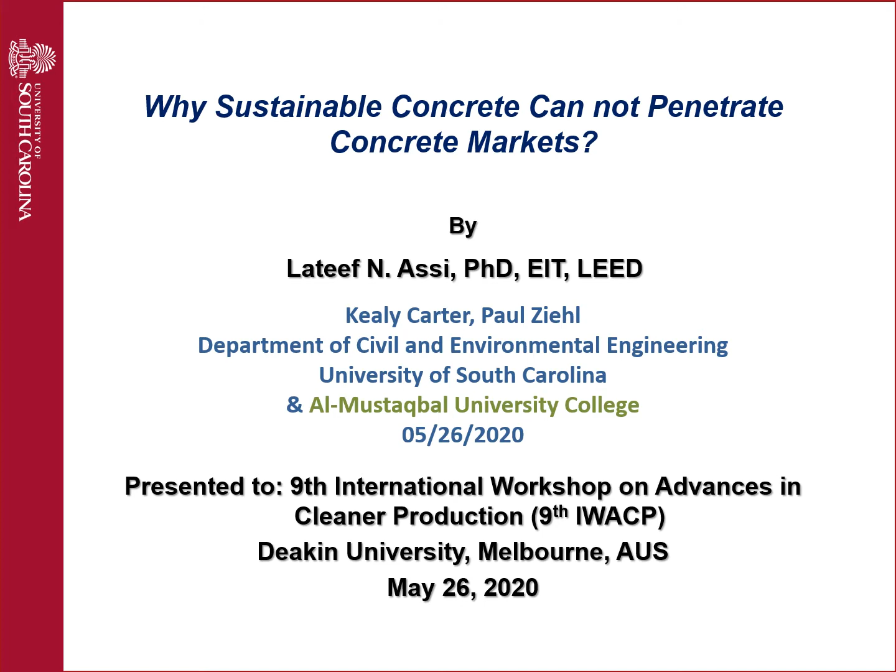So the outline: I'm going to talk about the background, then our previous work and findings, then objectives and survey results, and finally the overall conclusions.

So the background: we know that a lot of attention has been paid to global warming, and the main reason is the CO2 emission. A lot of studies show that Portland cement is responsible for between 7 to 10% of CO2 emissions. Therefore, the need for alternative cement is essential.

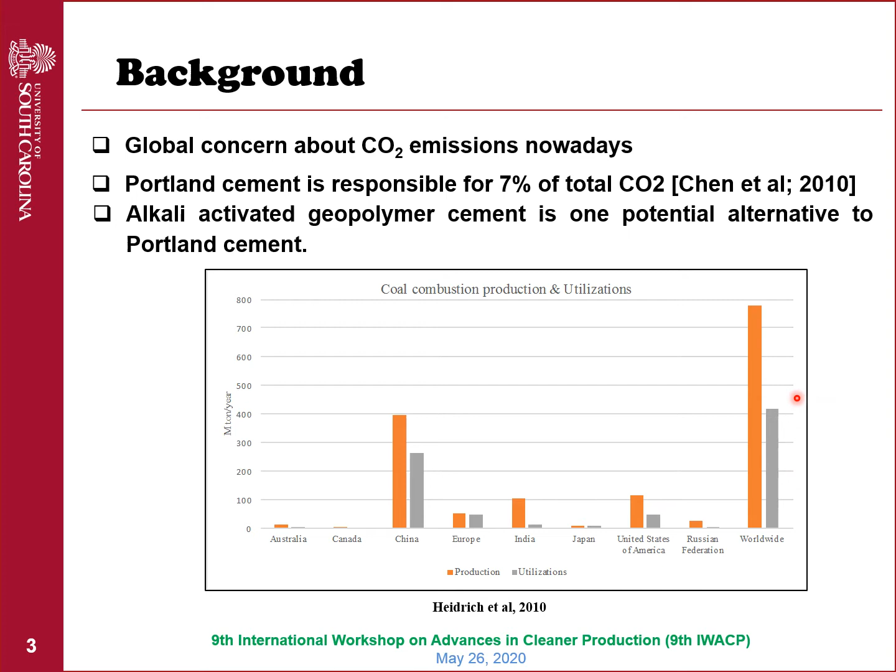So the geopolymer or sustainable concrete that we are using consists of an activating solution such as sodium silicate, sodium hydroxide, or a mixture of silica fume and sodium hydroxide, and a source of aluminum silicate such as fly ash, and fine and coarse aggregate.

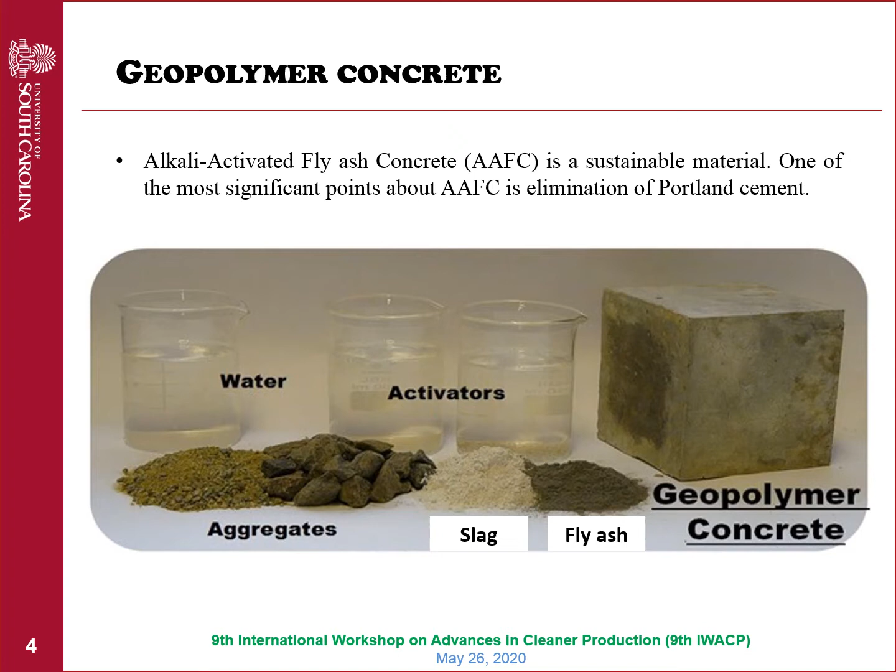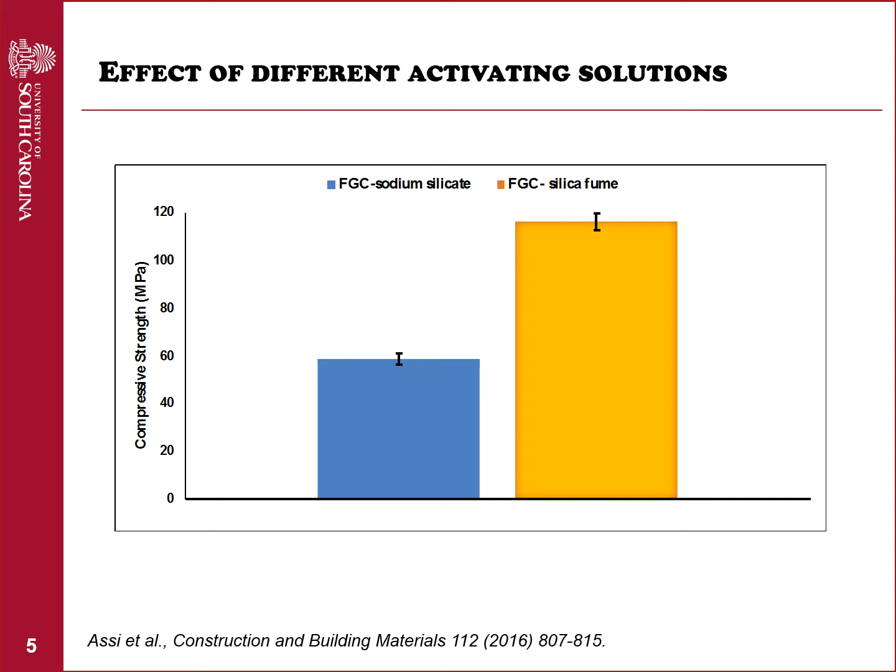However, the only problem with this concrete is the need for external heat. It has to be subjected to 70 Celsius for 24 hours.

So our next step was to eliminate the need for external heat, by introducing 5% up to 15% of Portland cement. So the need for external heat was removed, and the initial and final setting time was also improved. Also, we reached up to 65 megapascal.

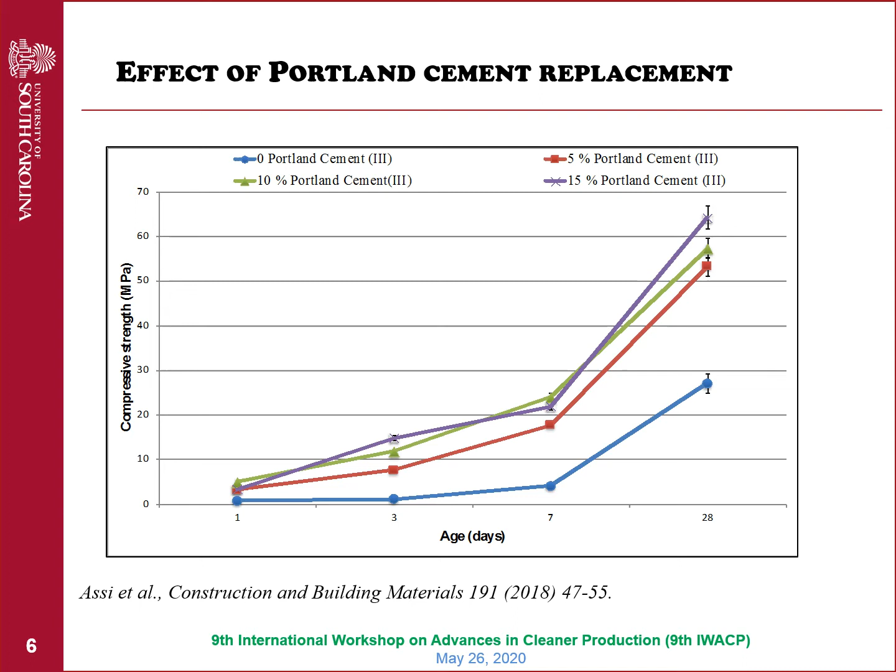Another problem that we fixed is the initial and final setting time. The main problem with our sustainable concrete is that the initial and final setting time is very short, within 7 minutes. So we introduced between 3 to 9% of sugar, and we found that the initial and final setting time was enhanced by more than 60 minutes.

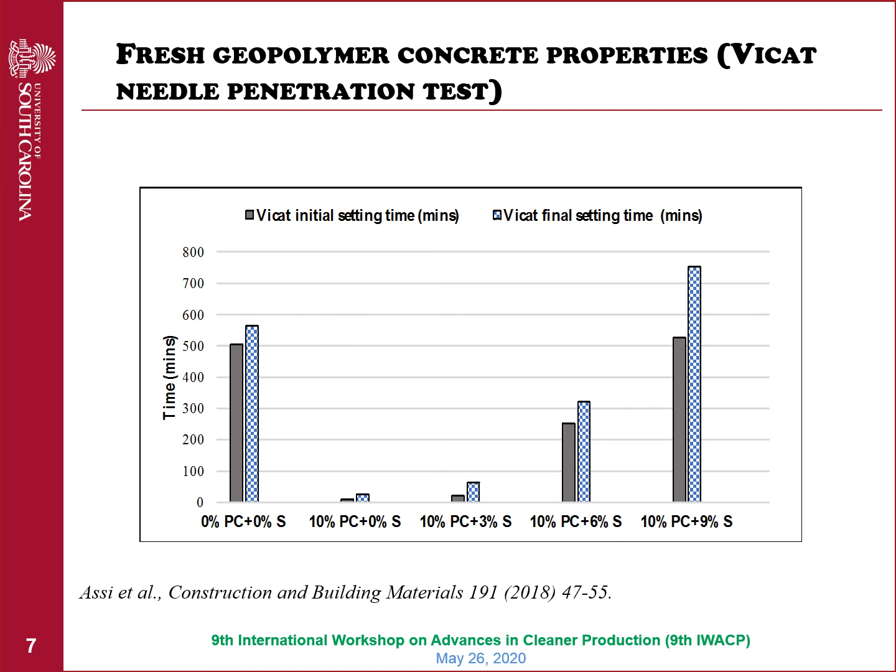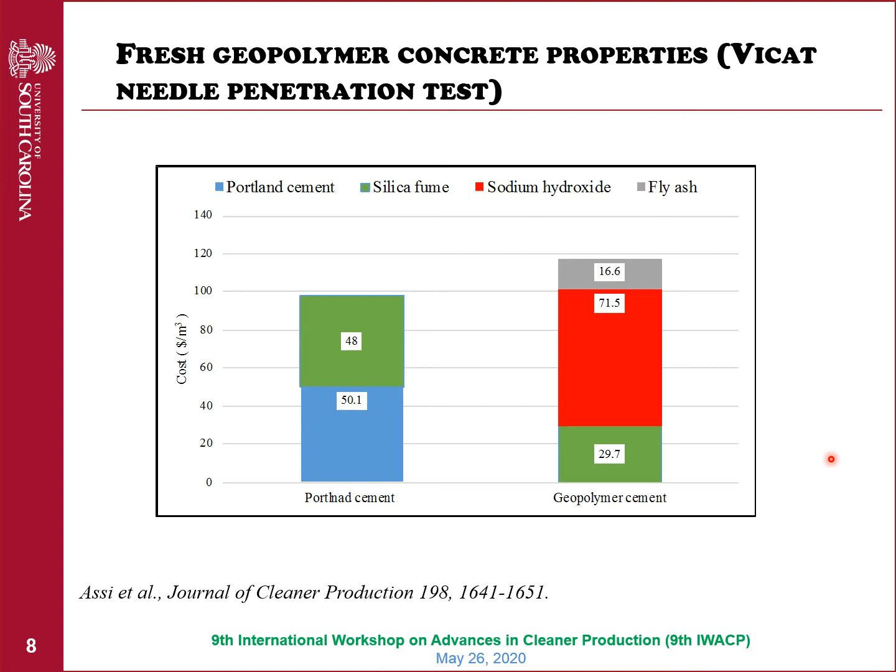This is really very good for using this concrete in ready mix. So the second thing that we checked is the cost, and we found that the cost of our concrete is much higher than Portland cement concrete, which really hinders the penetration of this concrete in the market. Most customers focus on the cost and then the properties.

So we introduced a new mix design by reducing the ratio of sodium hydroxide, which is the main reason for this high cost, and we reduced the cost by 40%.

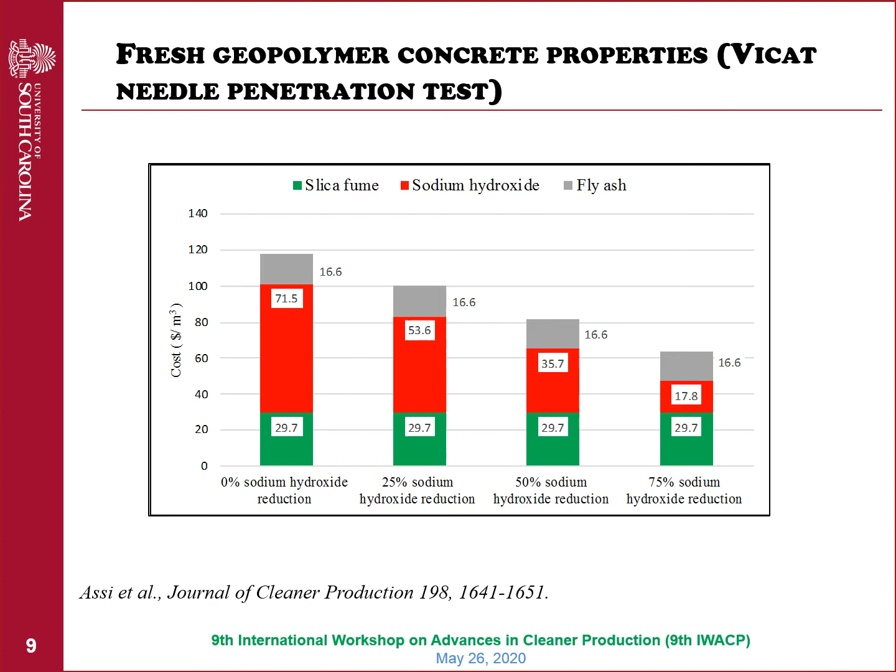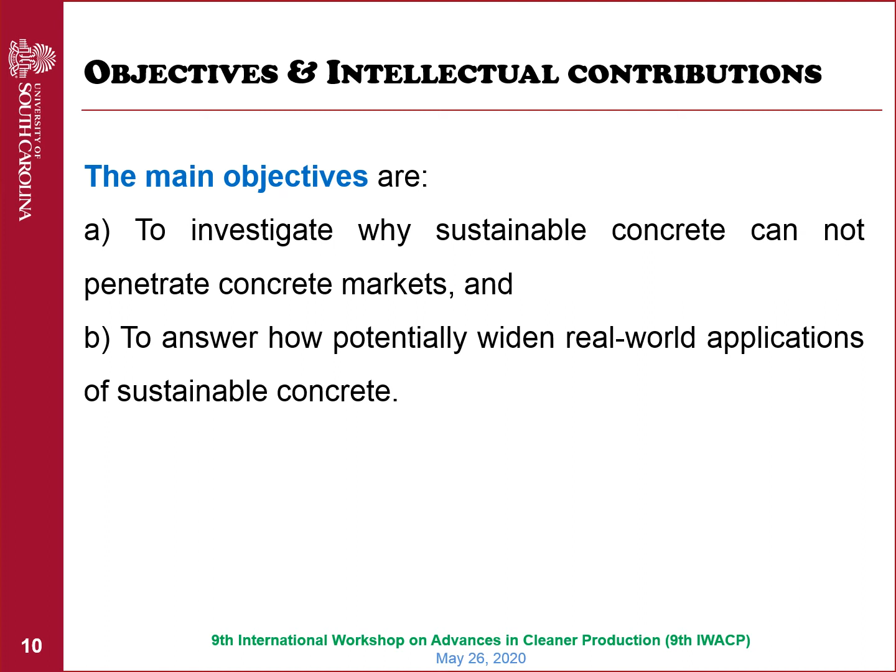So in this presentation, my main objectives are to investigate, first, why sustainable concrete cannot penetrate the concrete market, and second, how to potentially widen the real application of sustainable concrete.

So first of all, we took samples for doing the survey. I chose a variety of civil engineering professionals. Most of them are field engineers and construction engineers. Some of them are decision makers. Some of them also work closely with concrete. And I also took some academic people.

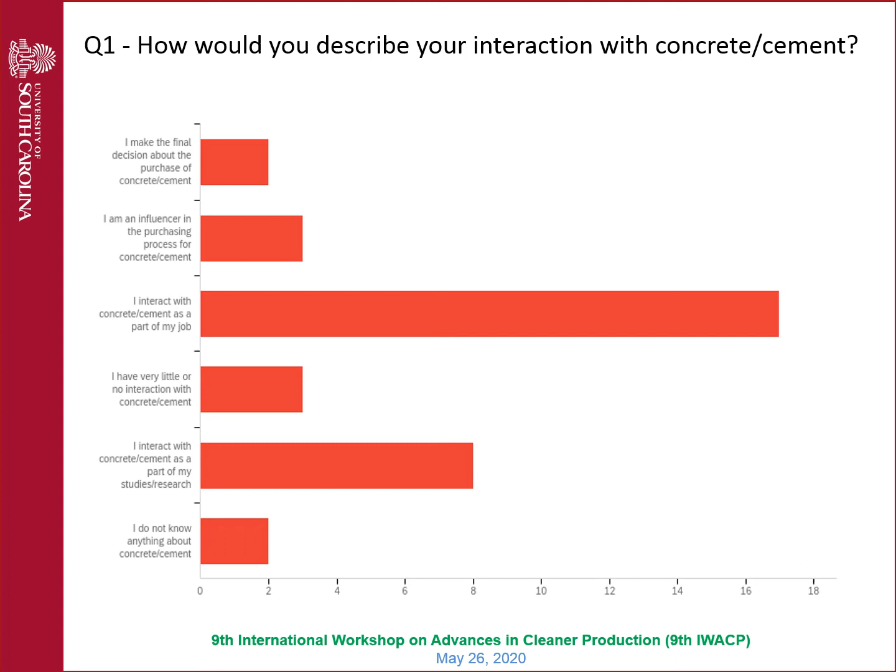So the second question was: please rate your familiarity with each of the following. We asked them to rate geopolymer concrete, sustainable concrete, and high volume fly ash concrete, which is part of the Portland cement replaced by fly ash. You can see here, the majority of them don't know about geopolymer concrete and also don't know about sustainable concrete.

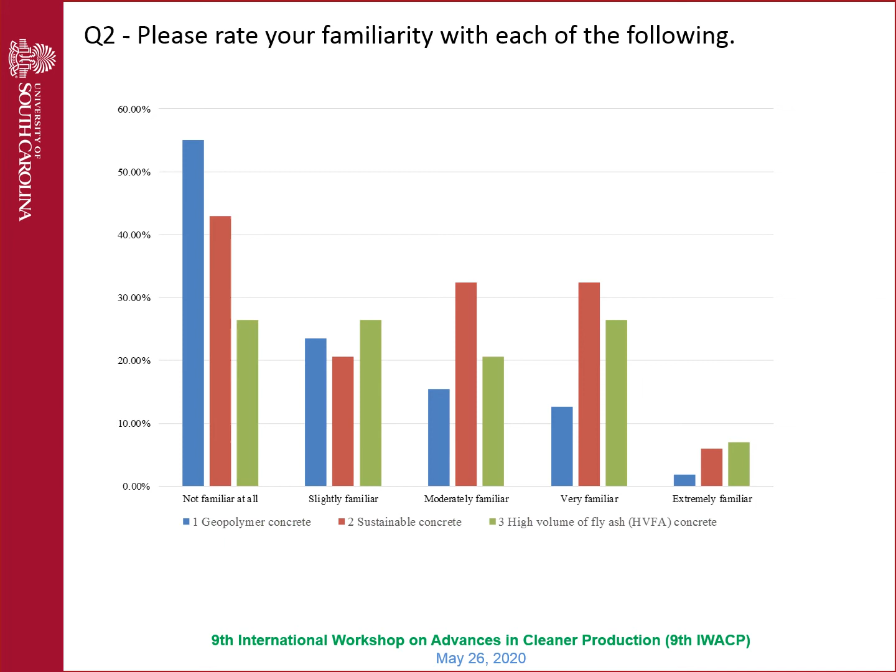However, many of them knew about fly ash concrete. So you can see, for fly ash, yes, but for sustainable concrete, still few of them know.

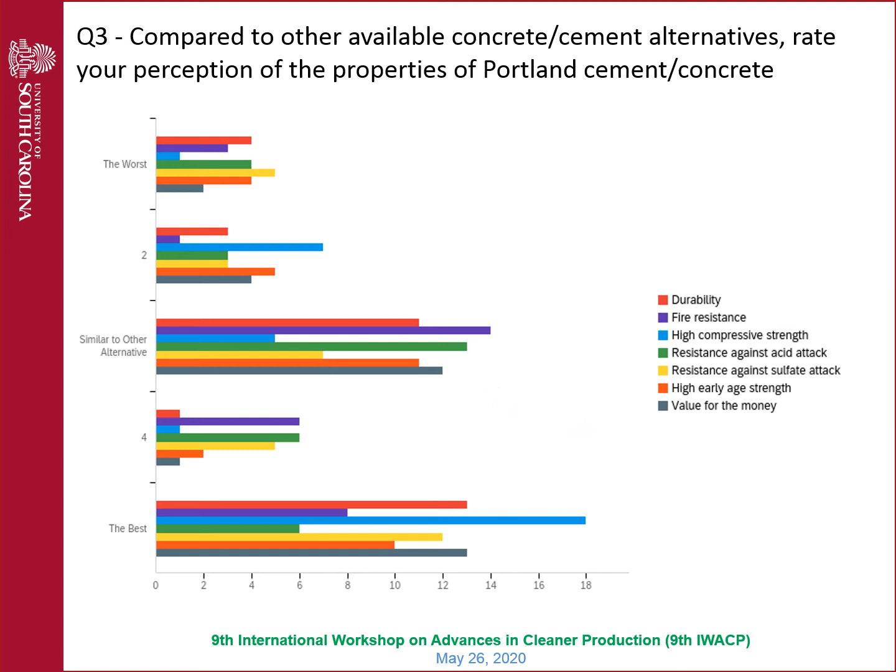The third question asked them about comparison, about the properties of Portland cement, how familiar they are. We found that most of them are familiar with the properties of Portland cement concrete, which is a very expected answer. Then we asked them how familiar they are with the properties of sustainable concrete.

We found that most of them don't know about the strength, for example, or many of them think it's not easy to access and get in the market. And many of them don't know that it's durable. However, most of them know it's environmentally friendly and reputable, and I think this is because of the name. Sustainable concrete means that it is environmentally friendly.

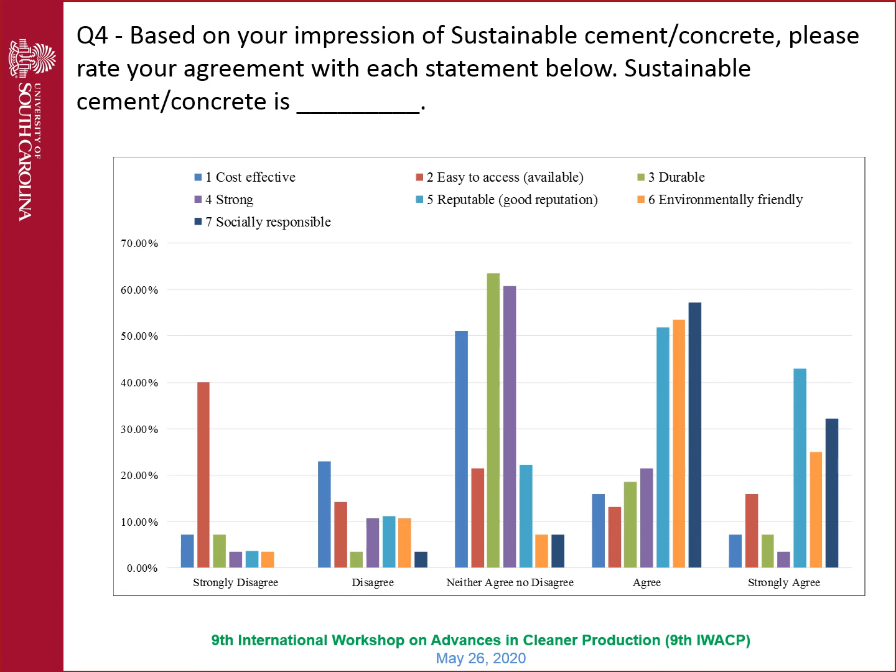So the fifth question asked them about the properties of sustainable concrete specifically. We found that most of them don't know about it, or they think it has properties less than Portland cement properties.

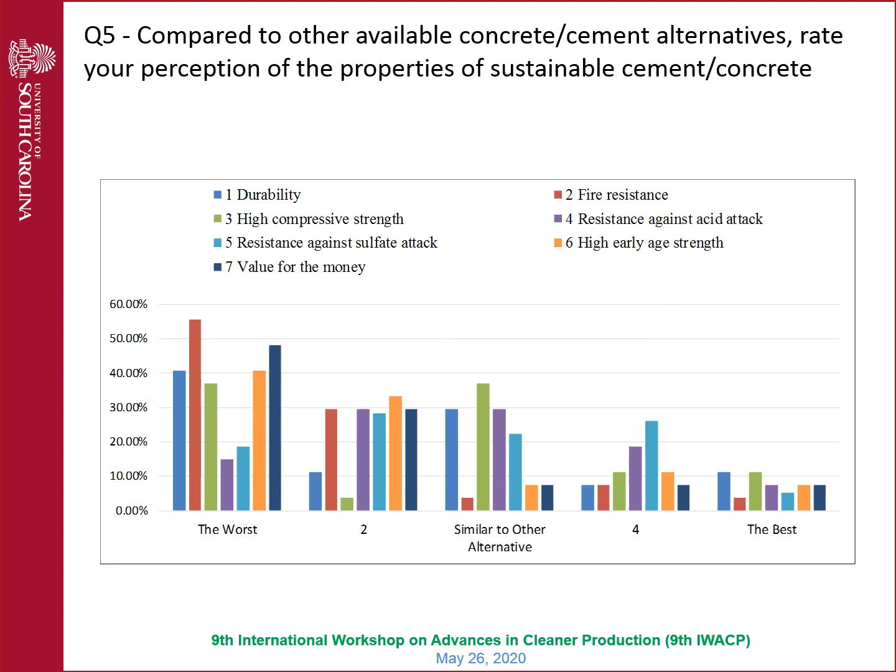However, the real result we found is that sustainable concrete has very good properties, and some are even better than Portland cement concrete.

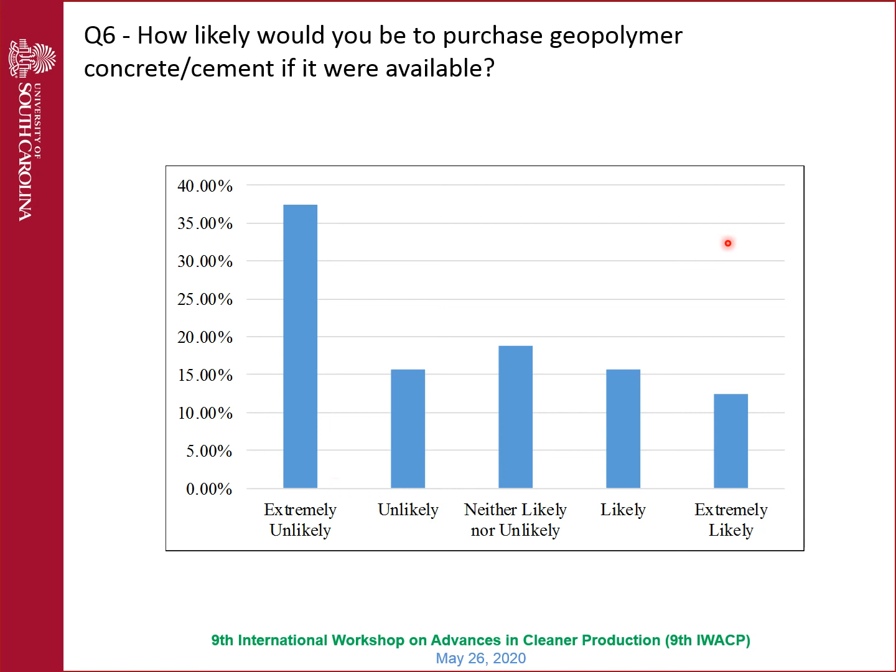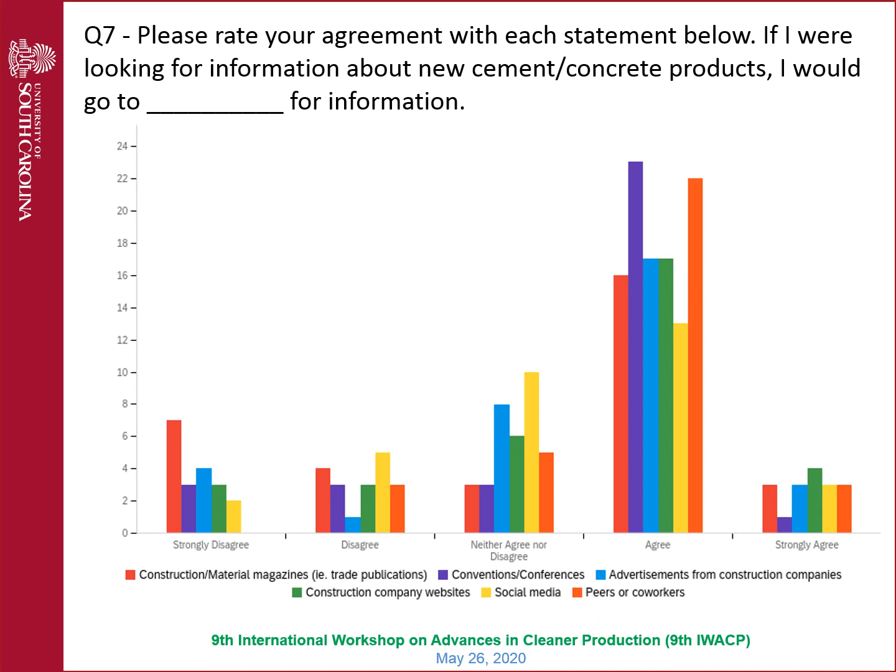Then we asked them how they could get information about a new concrete or new product. We found that most of them get it from conventions or conferences, and some of them get it from peers. So I think if we need to target them, we should think about conventions, or also getting people to transfer the information to others.

So our overall conclusion: we found that sustainable concrete can achieve very good properties, very good mechanical properties, and the initial and final setting consistency is very good in comparison with Portland cement concrete. However, most engineers don't know about it, and the majority of them think it has lesser properties. So our best advice is to conduct a marketing and communication plan.